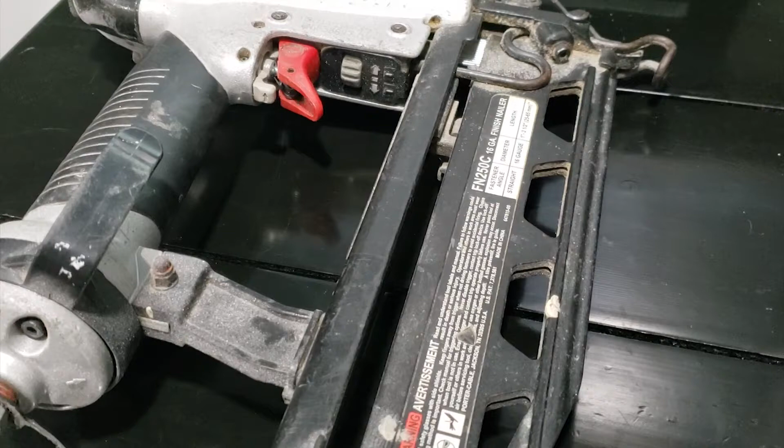Today I'm going to be working on this 16 gauge finish nailer gun, model FN250C. I was having an issue with this gun where you could hear air coming out from the trigger, so I ordered the replacement trigger valve assembly and replaced it. Unfortunately, the gun was still having issues—there was now some air coming out through the back. After taking the gun apart and thoroughly cleaning all the internals, I put everything back together and the gun was working, but it was still losing air from the back.

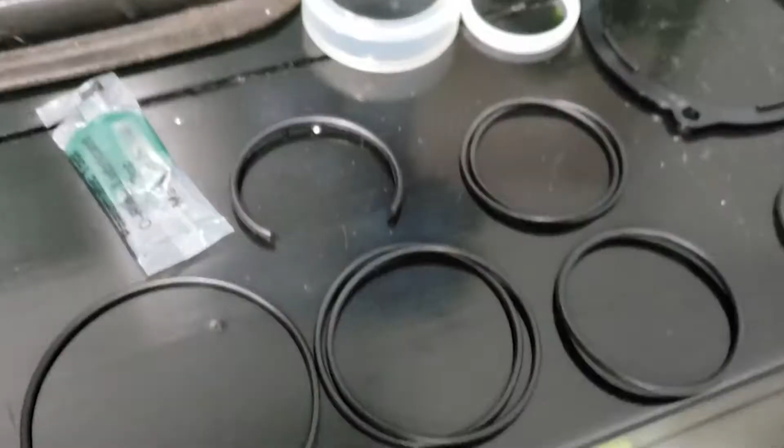So I decided to look up an O-ring repair kit to repair all the O-rings on the inside of the main body. I picked this kit from Amazon, part number 600872, and this kit is a complete O-ring kit to repair everything on the inside. This kit does not come with the trigger valve assembly that I had replaced earlier. I will provide a part number for that in the description if you guys need to replace that as well.

These are all the O-rings that come with the kit. This one and this one have two of the same size O-ring.

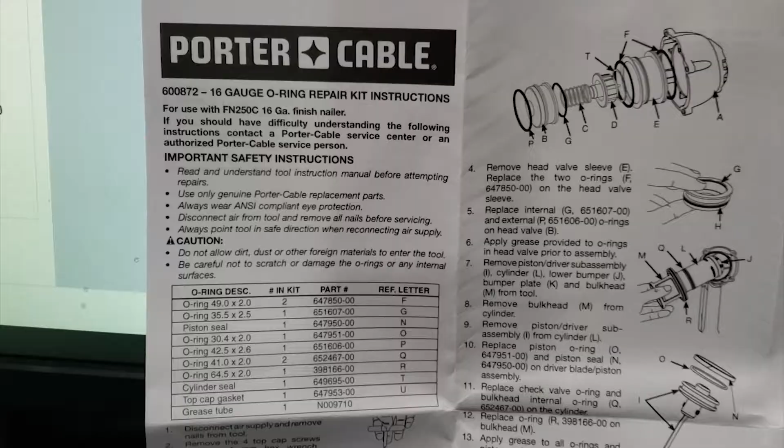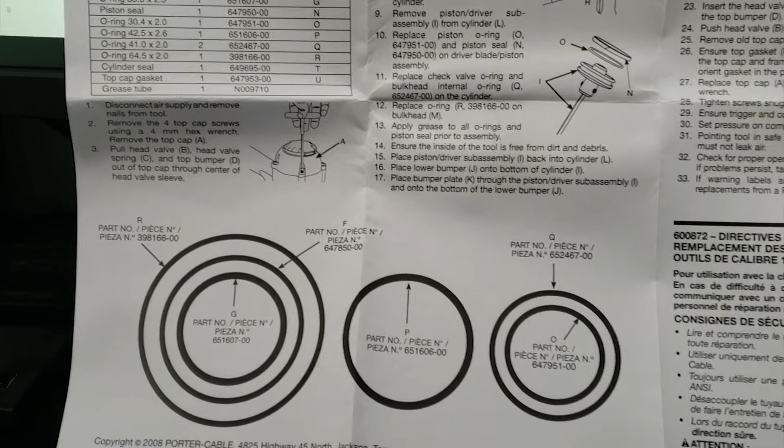Now I have taken this gun apart previously, so I've seen all the little parts inside of it and I've put it back together successfully. It's not that complicated—I'm going over the instructions. You just have to be careful and gentle with some of these gaskets as they can break on you. It's only 33 steps to take care of this. I will be scanning this document and putting it in the description for you guys if you want to look over it or if you're interested in completing the same job.

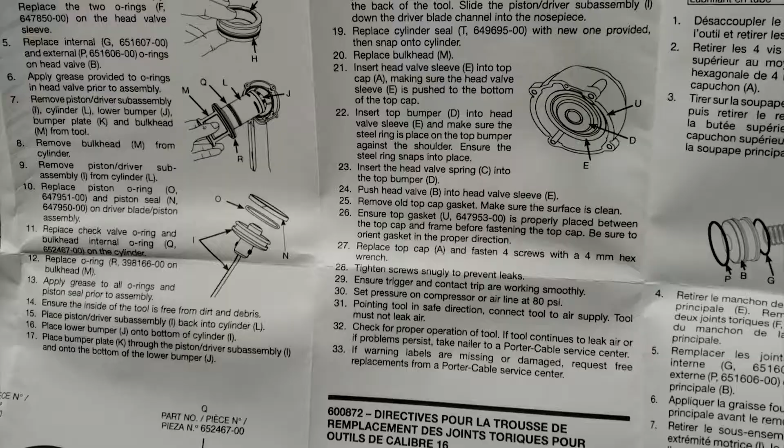In addition to the O-ring repair kit, I'm also using a hex socket set along with a couple of 3/8 extensions, a 3/8 ratchet, a small Allen key, a set of picks, and a hammer.

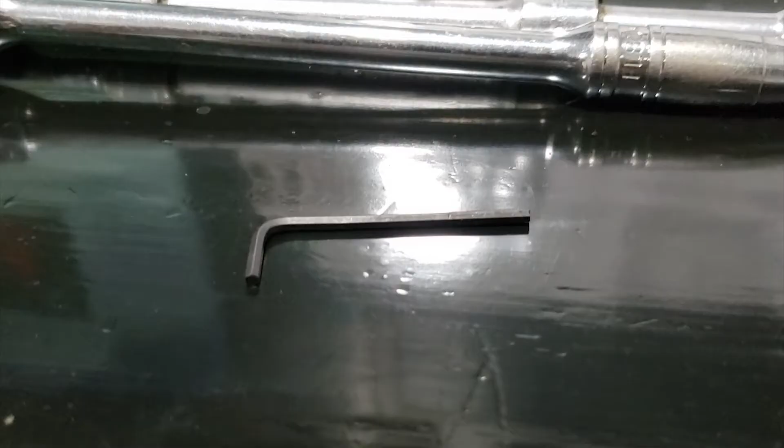I'm going to start by removing these four 4mm hex screws, and that will release the top cap. When removing those 4 hex screws, keep in mind that the cap is under tension by the spring underneath it.

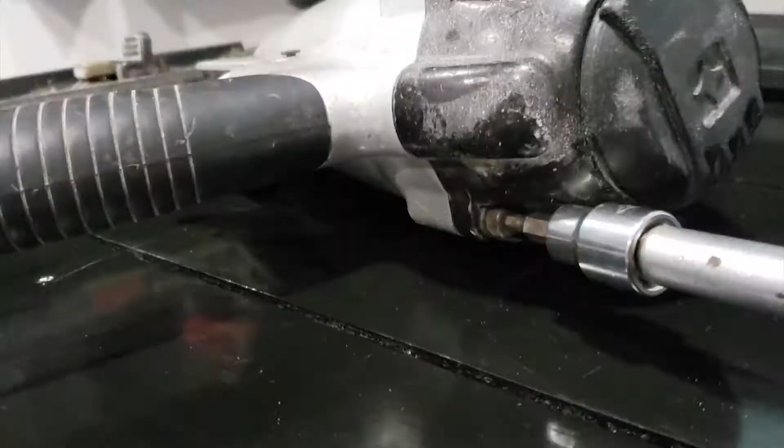I've now got my 4 hex screws out and I've got my top cap here. This is the gasket that goes in between the top cap and the rest of the body on the gun. The new kit came with a new one of these gaskets, so I'll be getting rid of this one and replacing it with a new one.

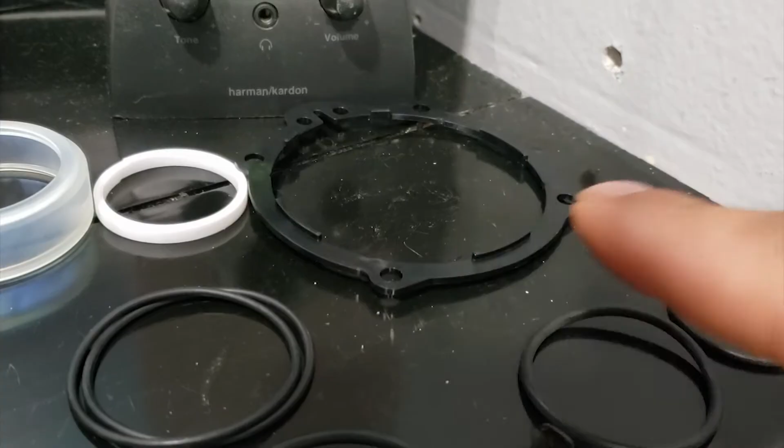There is a bit of air tool oil all over these parts, so you might want to grab a little microfiber towel and clean this stuff up so you don't make a mess everywhere. It is also important to keep in mind to not allow any dust or dirt to get inside of the tool.

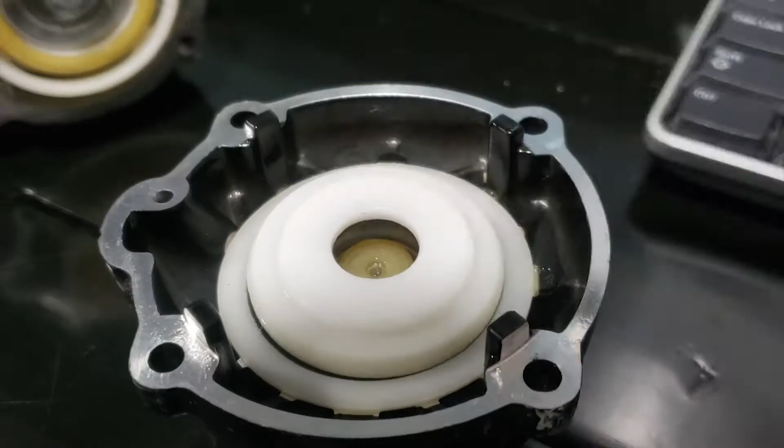I'm going to start taking apart the top cap by removing the head valve and the head valve spring. This is being held in here by the tension from the gaskets, so to get it out of there, I just pry against it like this, working it around all the edges while being gentle, making sure not to damage the head valve.

I got the head valve partially out, and again, I've just been using my pick to work the edges of it and get it to come out. Be very gentle—this is all plastic and it can easily get scratched up. If it gets scratched up, you won't get a seal anymore, even if you replace it with new seals.

You can see one of the gaskets is being exposed now. That's what keeps the head valve in there. The head valve is now out. I was able to get it out of there working it with the pick, and while getting that out of there, the head valve sleeve also came out, and it came out that easily, more than likely due to the oil that was in the tool, which helped it slide up.

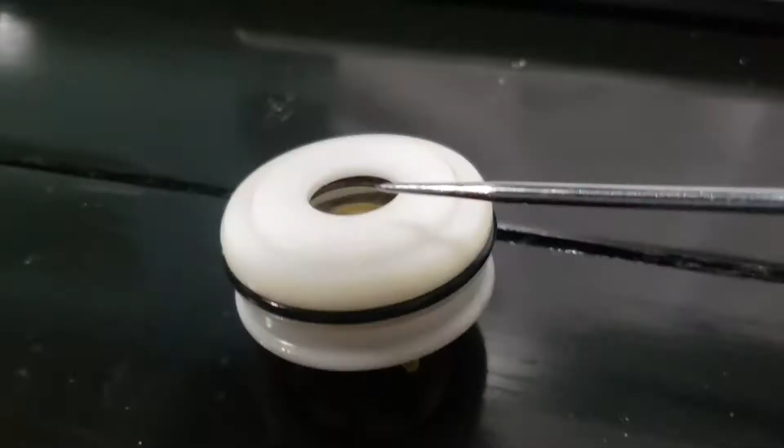If your head valve sleeve doesn't come out the way mine did, use your pick and work those edges, making sure not to damage the plastic, and it should come out the same way. I'm going to set apart my head valve sleeve as well as the top cap for now while I take the head valve apart and replace these gaskets.

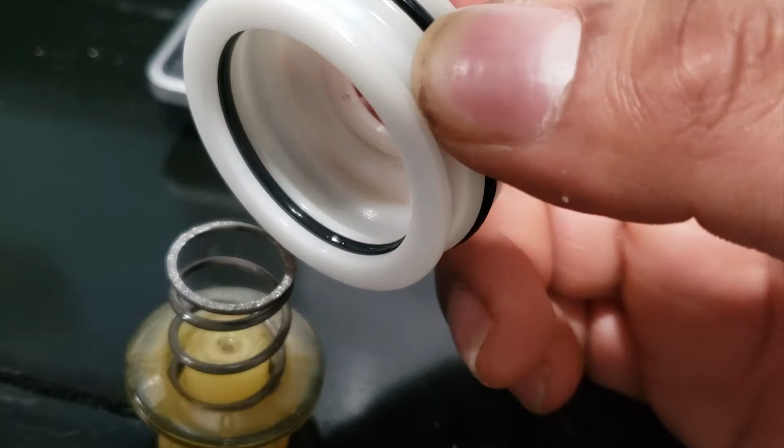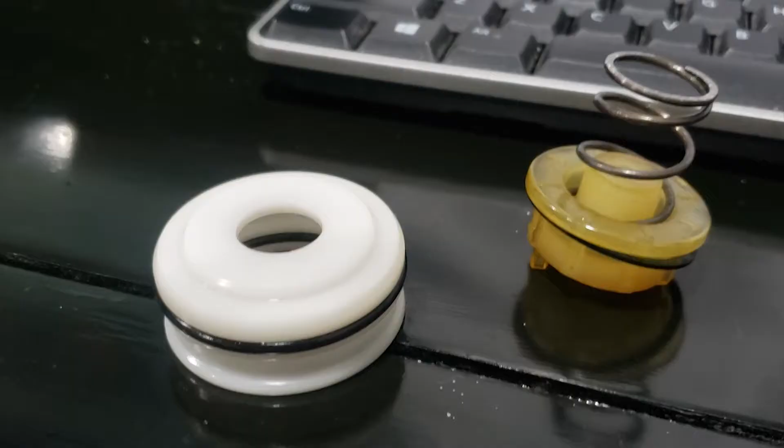The head valve, the spring inside of it, and the top bumper have now been separated. To get these to separate, I just wiggled the top bumper and it let loose. What's holding it in there is the gasket inside of the head valve. The top bumper has a cylinder seal, but this cylinder seal will not be getting replaced. The kit does come with a cylinder seal, but that one is for the piston.

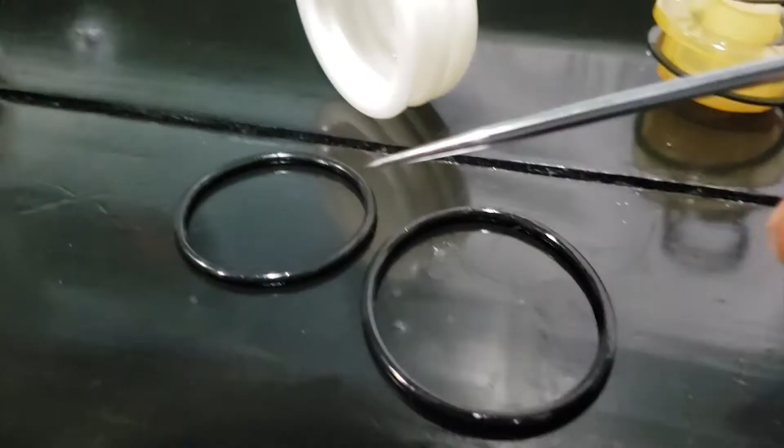With the top cap fully disassembled, I'm now going to go ahead and replace the 2 O-rings on the head valve as well as the 2 O-rings on the head valve sleeve. Using my pick, I'm going to work both of those O-rings out, being careful not to scratch the surface. I've removed my 2 O-rings that were attached to the head valve.

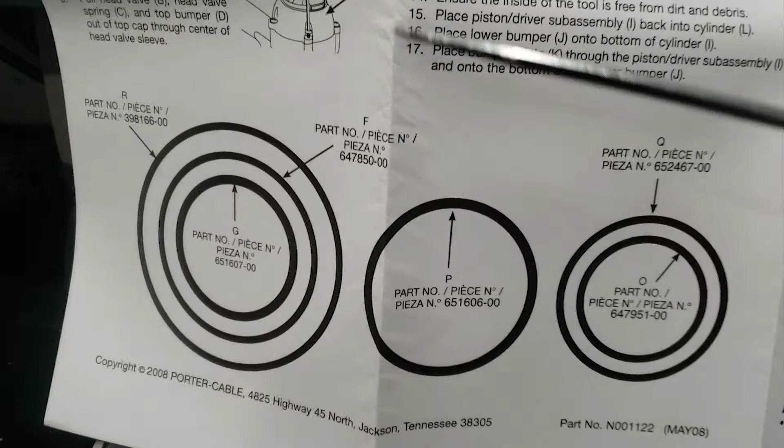Looking at the instructions, the 2 O-rings that belong to the head valve are the G and P O-rings. Looking at my set of O-rings, it appears that this one and this one are the P and G O-rings. You can also try to match them up with the old O-rings that you pulled off the head valve, and you can use the set of instructions that comes with the kit to match them up. These instructions were printed in 1:1 scale, so this drawing of the P O-ring is the exact size of that O-ring, as well as the G O-ring. The G O-ring is the smaller one and the P O-ring is the bigger one.

Before installing those O-rings, make sure to apply some of this O-ring lubricant to your new O-rings to ensure that they seal properly once installed. Both of the O-rings on the head valve have been replaced.

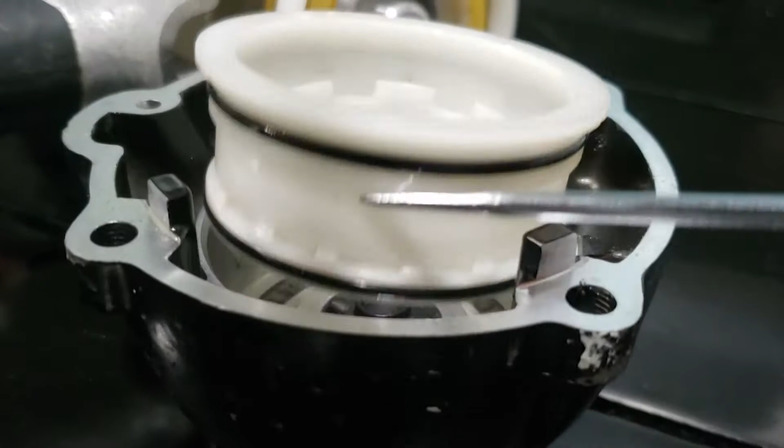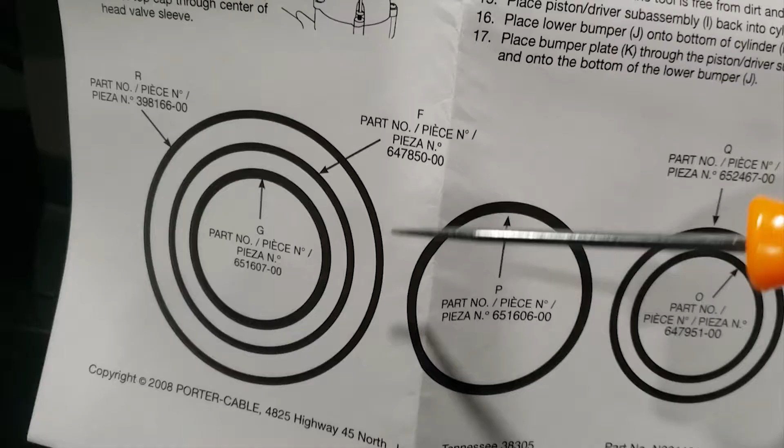I'm now going to move forward with replacing the O-rings on the head valve sleeve. Looking at the diagram, the head valve sleeve uses 2 of the same O-rings, letter F. Looking at my O-ring kit, it looks like these 2 right here are the letter F. With the kit, you get two matching pairs of O-rings. The bigger pair are the F O-rings. You can confirm that by grabbing one of the O-rings and matching it up to the instructions.

I removed both of the old O-rings and matched them up with the new ones and confirmed they are the right size. I'm going to use some of the O-ring lubricant, apply it to the O-rings, and reinstall them on the head valve sleeve.

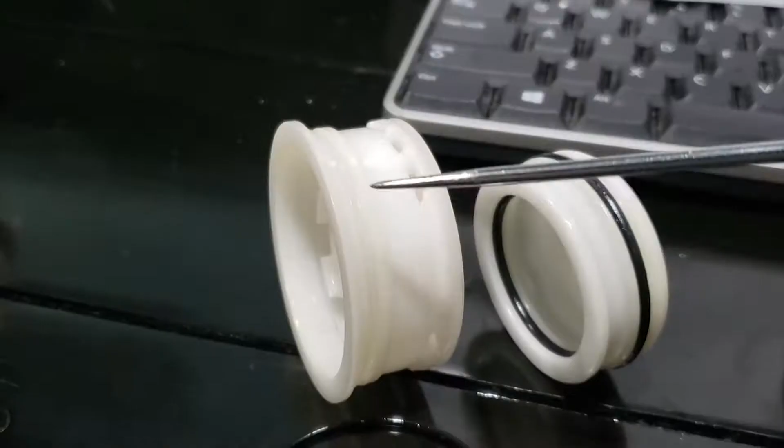There is an additional gasket for the top cap that is not mentioned in the instructions, and that is for this gasket. That gasket is what creates the seal between the top cap and the exhaust port.

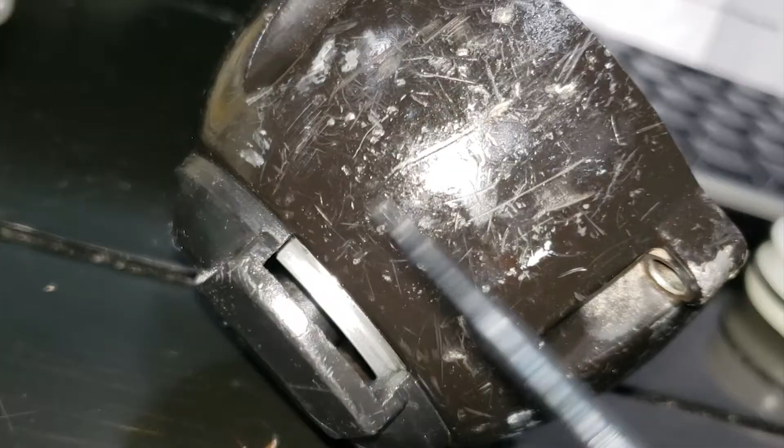To get to that gasket, you have to line up that pin with the opening here, and to get that pin to line up, you turn this exhaust port until the pin lines up with the opening. Once you line up the pin with the opening, you will see that the pin just starts sliding out on its own. Once you get that pin out of there, you should be able to separate both pieces.

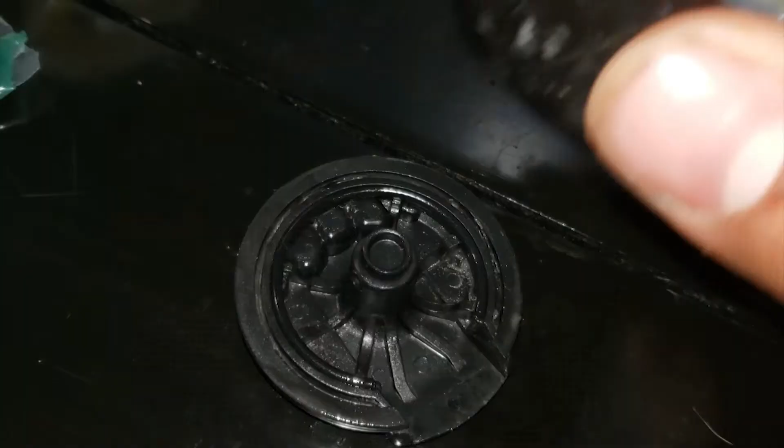There is a shim there, be careful not to lose that. This is the gasket that came in the kit that is not mentioned in the instructions. Use your pick to work that out of there. There's the gasket. Looking at the gaskets that came with the O-ring kit, it's pretty easy to match them up, as that is the only one that looks like that.

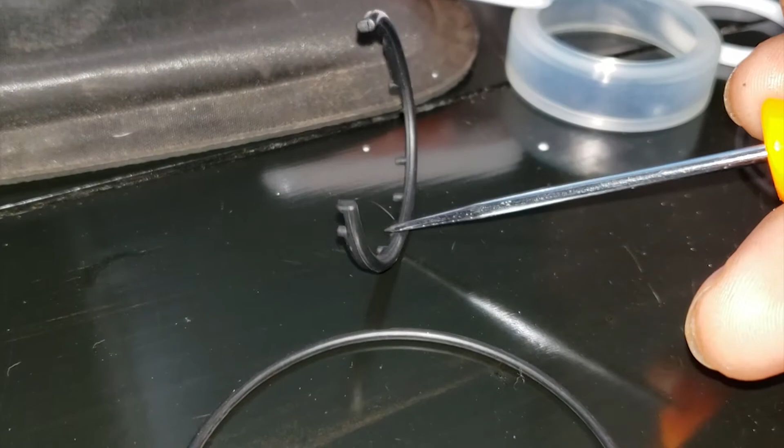Using the O-ring lubricant, apply some around this O-ring and reinstall it back onto this cover. Make sure your new O-ring is fully seated, and now this is ready to be reassembled.

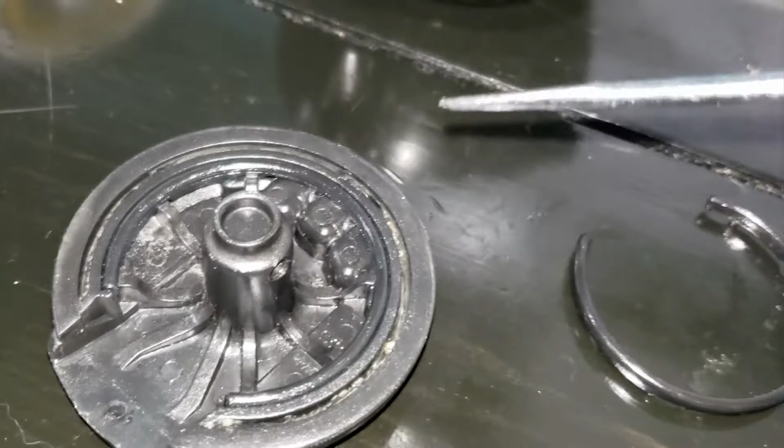The process to reassemble it is the opposite of the disassembly. I lined up the hole on the exhaust cover, and I've slid the pin back in through the opening and into the holes. I twisted the exhaust cap in the back to make sure that pin won't slide back out of there. It is now time to reassemble the head cap.

To reassemble the top cap, start by inserting the head valve sleeve back into the top cap, making sure not to grab the edge of the gasket. When you're pushing down, push evenly, and make sure that the head valve sleeve is all the way down and bottoming out.

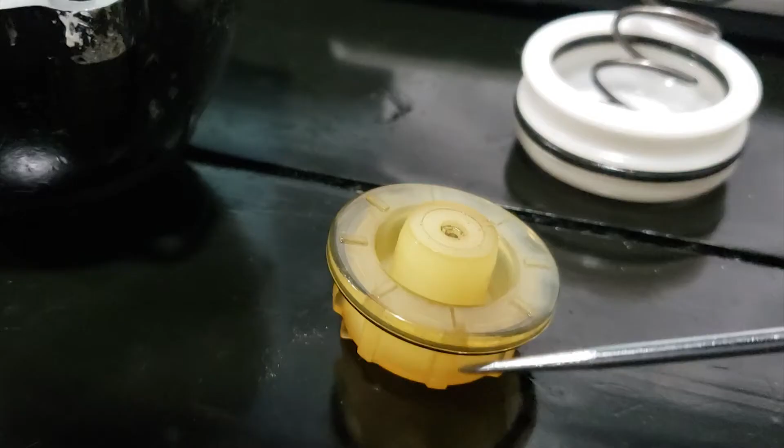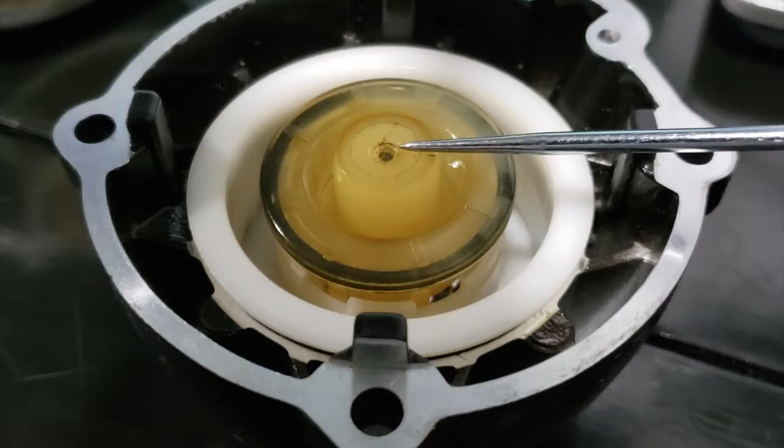Next is the top bumper. Remember, there is a steel ring here, and that needs to be pushed all the way down onto the top bumper. Next, you will notice that one of the splines on the top bumper sticks out more than the other ones. Make sure to line that spline up with the relief where this pin would normally slide out of. Once your top bumper is lined up, you can go ahead and push it down.

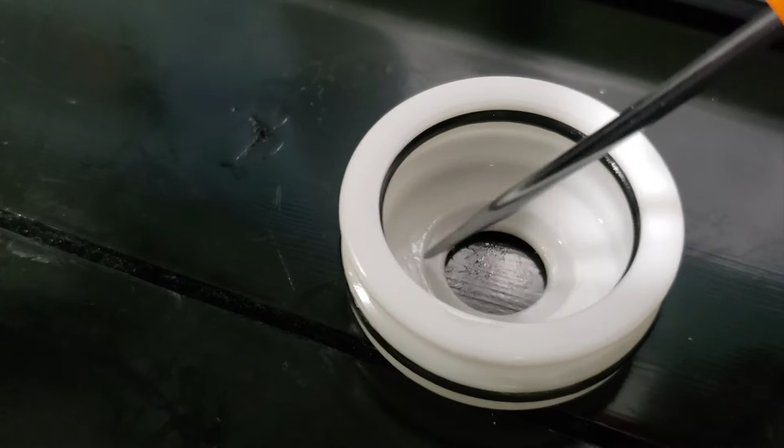Next is the valve spring. The valve spring is inserted into the top bumper, and the other end of the spring will rest on this relief on the head valve. With the spring inserted into the top bumper, you can now grab your head valve and push it into the head valve sleeve, making sure that the spring lines up with the relief on the other side of the head valve.

It is a little bit tricky to get the head valve to push into the head valve sleeve, and the best way to get this in here is to make sure you're putting even pressure so that it doesn't tilt one way. Next is the top cap gasket that sits on the surface of the top cap. This right here is your top cap gasket. Before installing it, make sure that the surface of the top cap is clean.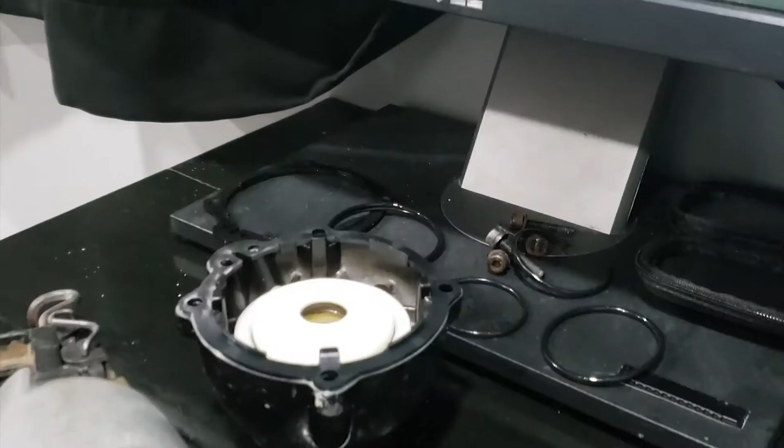The top cap gasket is the same on both sides. When installing it, make sure to line up your holes. Once it's lined up, it'll fall right into place. I'm going to set the top cap apart for now, as that assembly is complete.

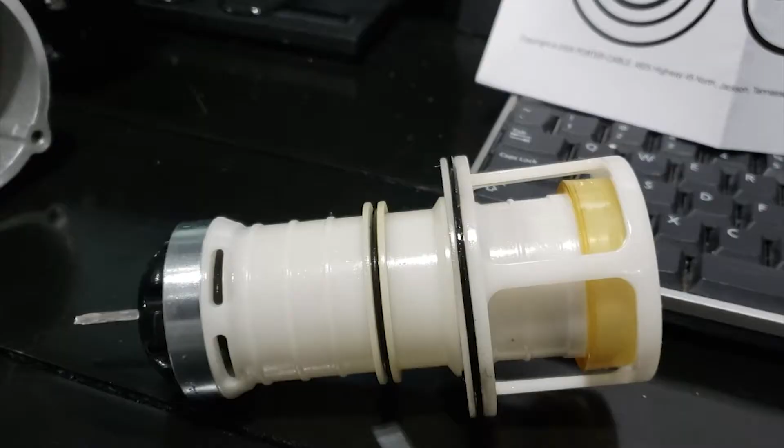Next, I'm going to remove the piston/driver sub-assembly along with the cylinder, lower bumper, bumper plate, and bulkhead. To get this out of here, just grab from the end and pull out towards you. It might be a little tricky to get this assembly out of there. Just wiggle it out gently and it should come out. That is what the inside of the gun looks like now. There is nothing left in there.

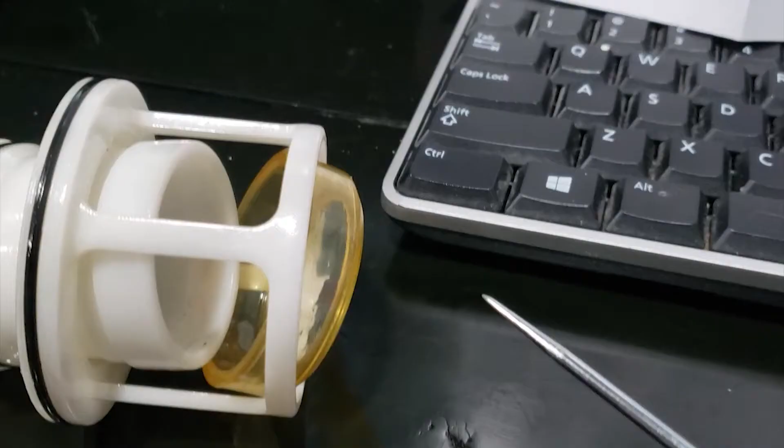Start by separating the bulkhead from the cylinder. The bulkhead is able to separate from the cylinder by sliding it up this way. The cylinder seal will also need to be removed in order to get the bulkhead out of there. Work the edges of the cylinder seal in order to get it out of there. A new cylinder seal was provided in the kit.

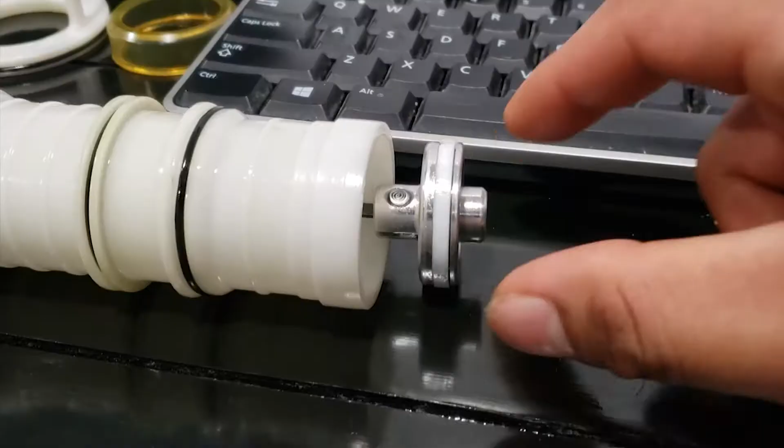Remove the piston/driver sub-assembly from the cylinder by sliding it out going this way. The piston seal and the O-ring behind it will need to be replaced. The piston seal has an opening here. Grab the edges of the seal and pull it off. With the piston seal removed, you can now see the O-ring attached to the piston/driver. Remove the O-ring attached to the piston/driver.

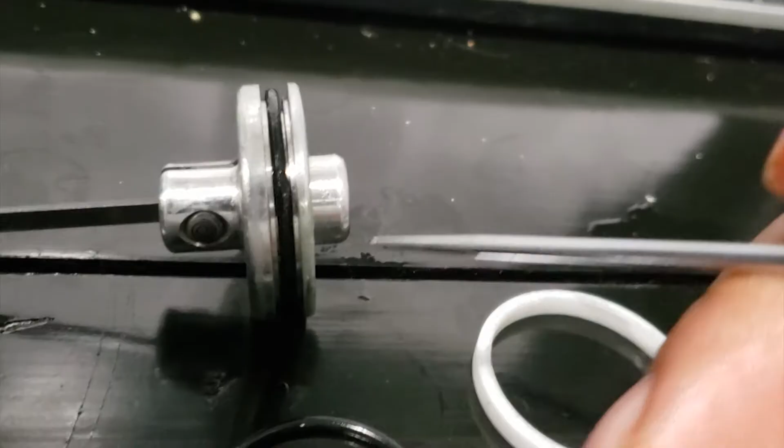From the O-ring kit, the smallest one left is the piston O-ring, and this white ring is the piston seal. Comparing them side by side, they appear to be the same size, the piston O-ring being letter O and the piston seal being letter N. Once the new piston O-ring is installed, you will notice that it is a little bit loose. That is actually normal, as it is the piston seal that picks up the slack. Reinstall the new piston seal.

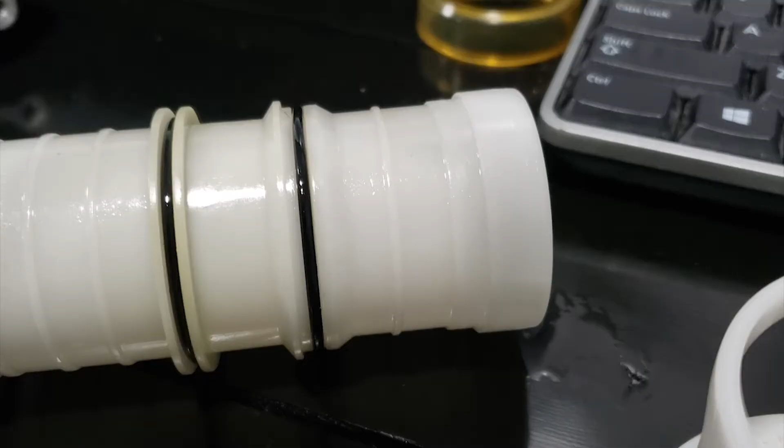Up next is the check valve O-ring and the bulkhead internal O-ring on the cylinder. So that's going to be both of these O-rings right here on the cylinder, and those are the letter Q O-rings, so they're going to be the same. Looking at the remaining O-rings, it looks like these are the Q O-rings. Again, be careful when removing these O-rings so you don't damage the cylinder.

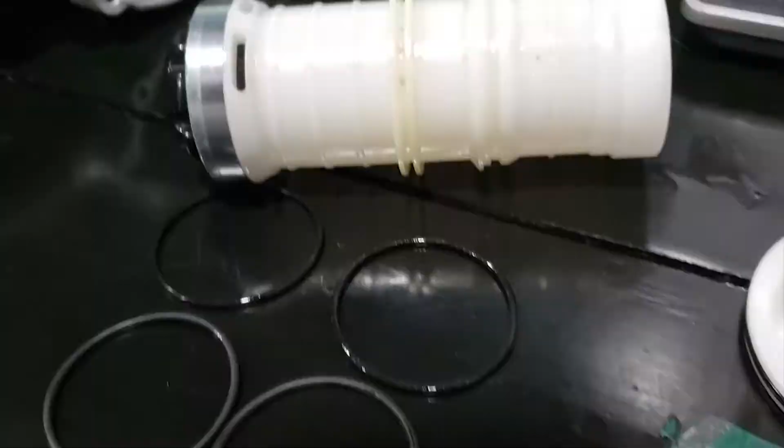The final O-ring left to replace is the one on the bulkhead. Following our instructions, it looks like that's going to be O-ring R. The R O-ring is the final and biggest O-ring in the kit. Matching up the old O-ring with the new one on the left, they appear to be the same size.

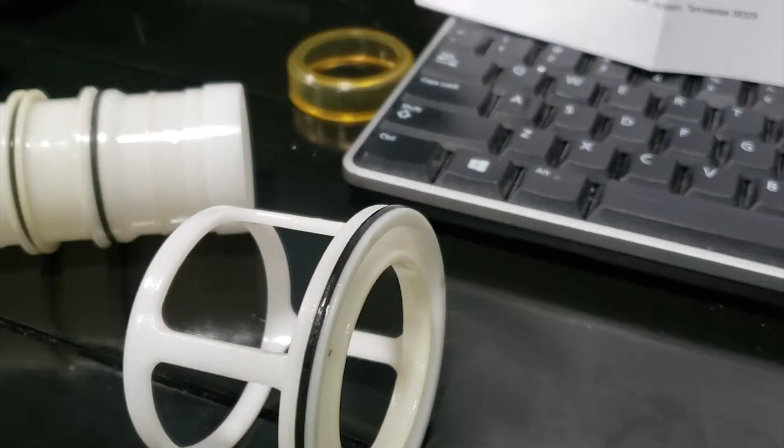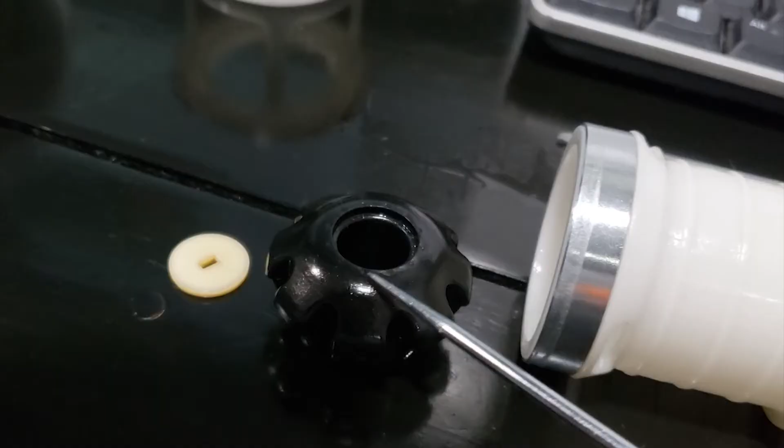The piston/driver subassembly, cylinder, lower bumper, bumper plate, and bulkhead are now ready to be reassembled. Make sure that all the O-rings have enough grease applied to them before reassembly. The lower bumper and the bumper plate may or may not have fallen off when removing the cylinder from the body of the gun. Start by placing the piston/driver subassembly back into the cylinder.

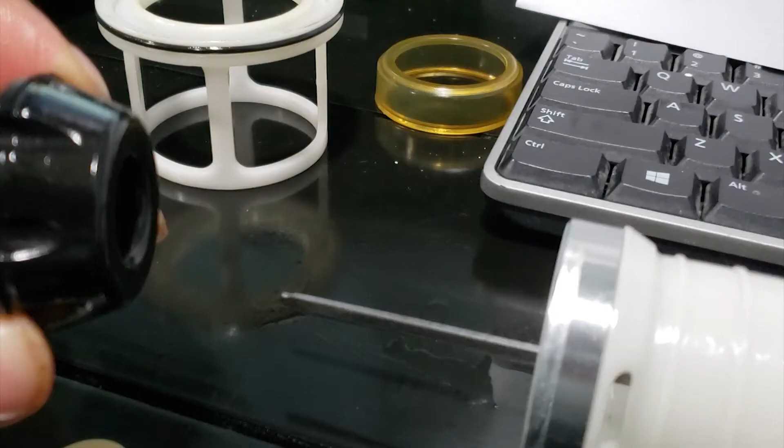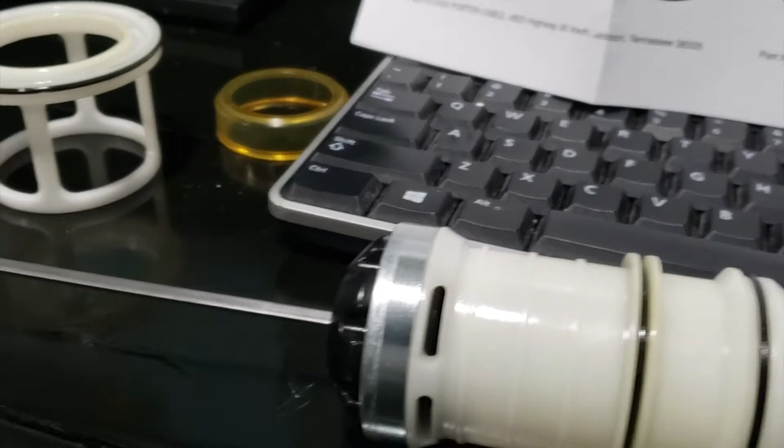Place the lower bumper onto the bottom of the cylinder. Place the bumper plate through the piston/driver subassembly and onto the bottom of the lower bumper. Now slide the piston/driver subassembly down the driver blade channel and into the nose piece. The head of the piston/driver subassembly will line up with the nose piece. The piston/driver subassembly will not slide all the way in.

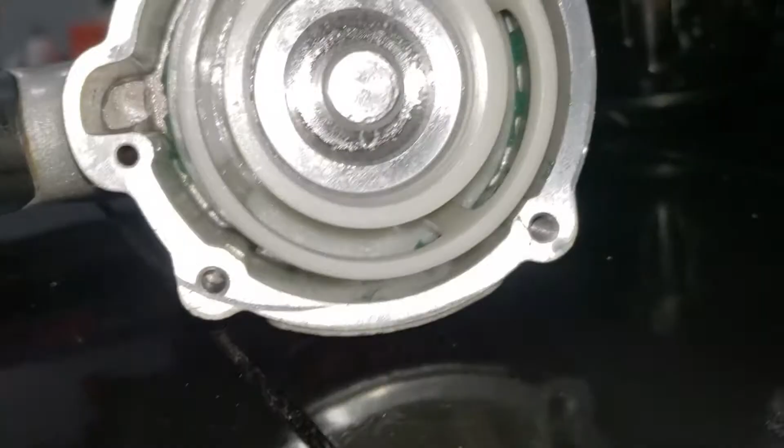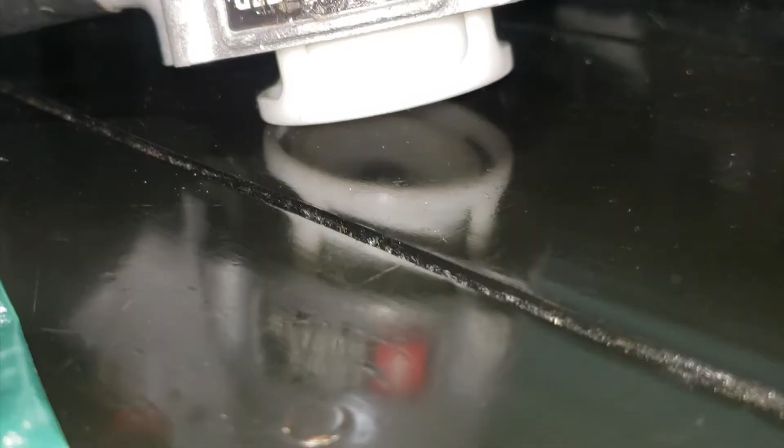Reinstall the bulkhead by sliding it onto the cylinder. Keep even pressure on all sides to ensure it slides in evenly. Getting the bulkhead to sit back in there is probably one of the trickiest parts of this procedure, and that's because it's sealing against the cylinder and it's also sealing against the housing on the tool. So what I ended up doing to get it to seal in there evenly without crushing or damaging any of the new O-rings is put it on upside down and then put pressure from the top down evenly to get it to slide back in there.

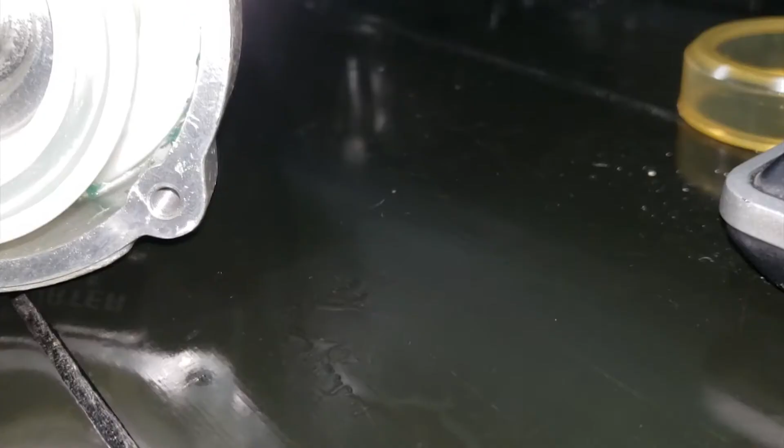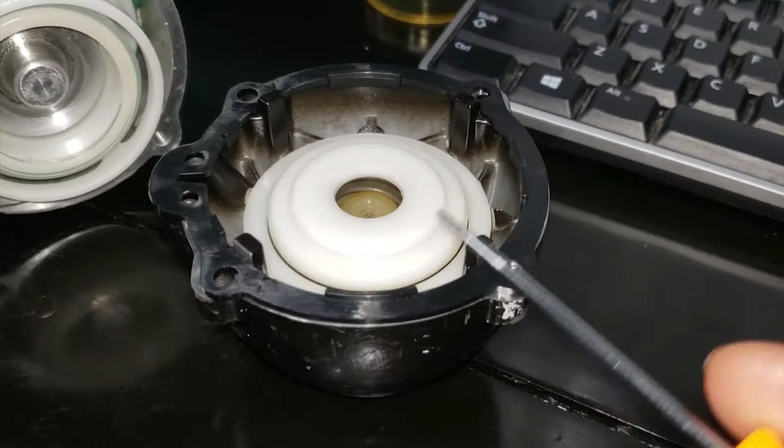Next, grab your cylinder seal, letter T, and snap it onto the back of the cylinder. I've got the cylinder seal halfway in there. I applied a little bit of this grease onto the edges to help it slide onto the cylinder a little easier. Okay, we are now ready to reinstall the top cap. Just make sure that the holes on the top cap gasket are lining up properly. These two holes on the top cap line up with the bottom of the gun.

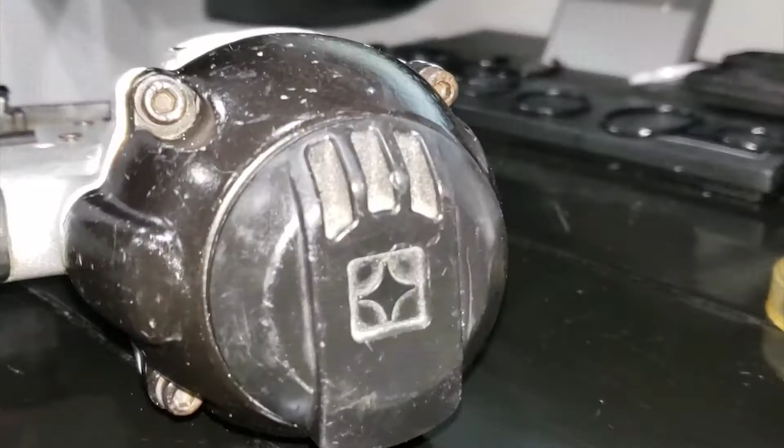I've now got all 4 of my screws started. I'm going to finish running them down. I would suggest running these down little by little in a crisscross pattern. Remember that top cap is spring loaded, so there's going to be tension when putting the screws back in. All 4 screws are now installed.

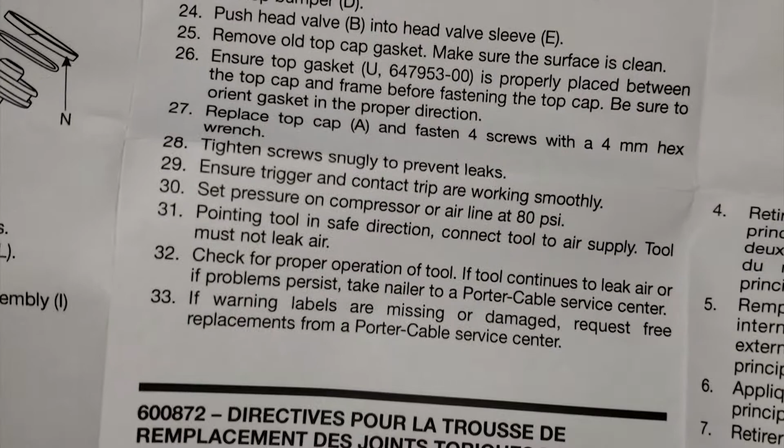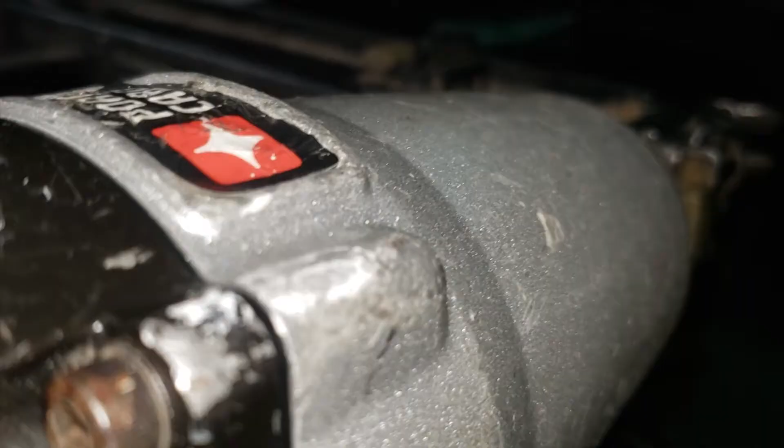There are no torque specs on these instructions. It just says to tighten screws snugly to prevent leaks, so I just tightened them down to what I thought was tight enough. Again, remember there's a gasket in between the top cap and the body of the gun, so they don't have to be extremely tight. I also noticed that these screws had some sort of blue Loctite on them, so if you guys want to go ahead and use some blue Loctite, you are welcome to.

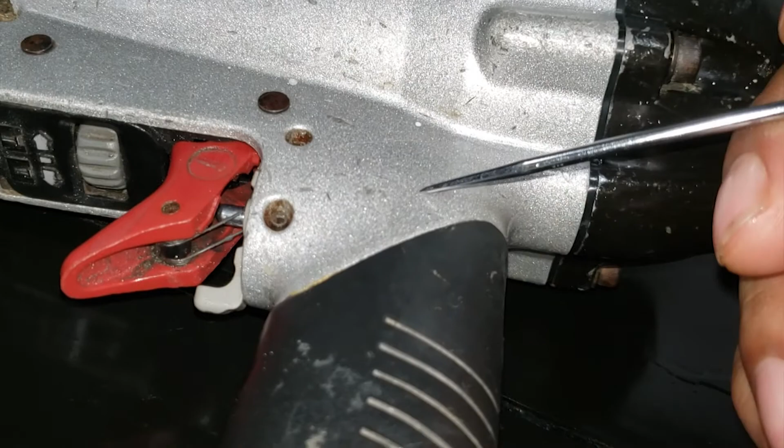So that actually covers all the instructions for installing this O-ring kit. Now I'm also going to be showing you guys how to replace this trigger valve assembly. To get to the trigger valve assembly, you want to start by driving these 2 roll pins out. I like to use a small Allen key and a hammer. Be careful not to damage the head of the roll pin. I've got both of my roll pins out.

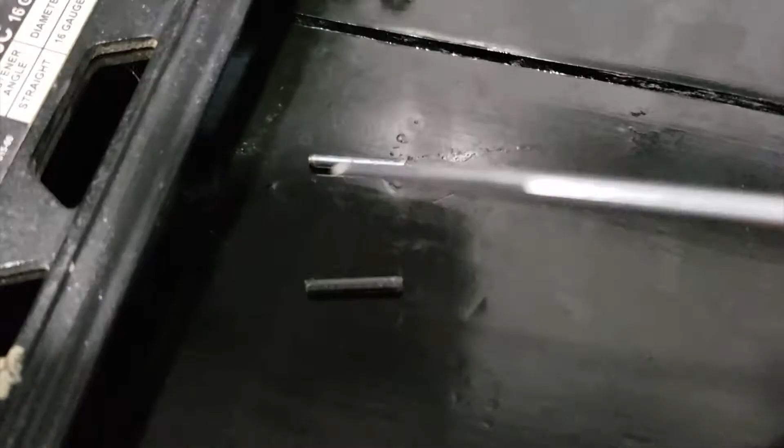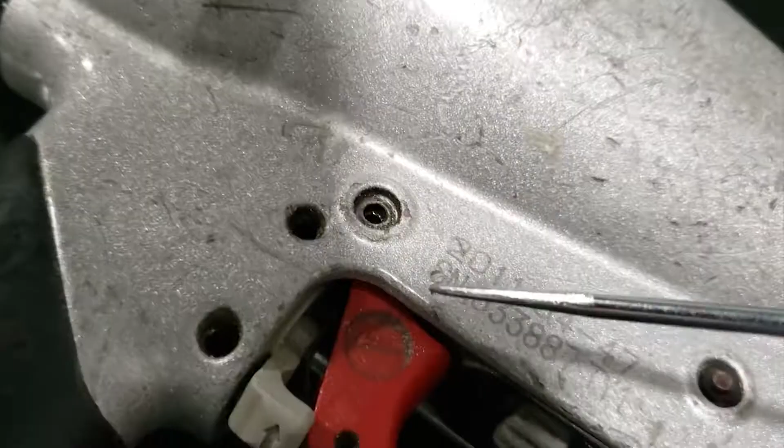The longer roll pin goes on the hole up top and the smaller roll pin goes on the hole at the bottom. You will also have to remove this pin right here that holds the trigger button. Be careful not to damage this little O-ring that comes out when you slide that pin out. There is one similar on this other pin right here. We do not have to remove this pin, just this one. That little O-ring will lock onto the head of this pin.

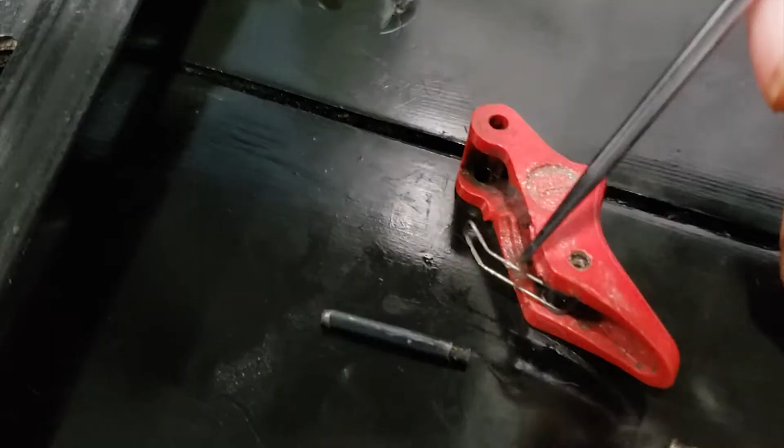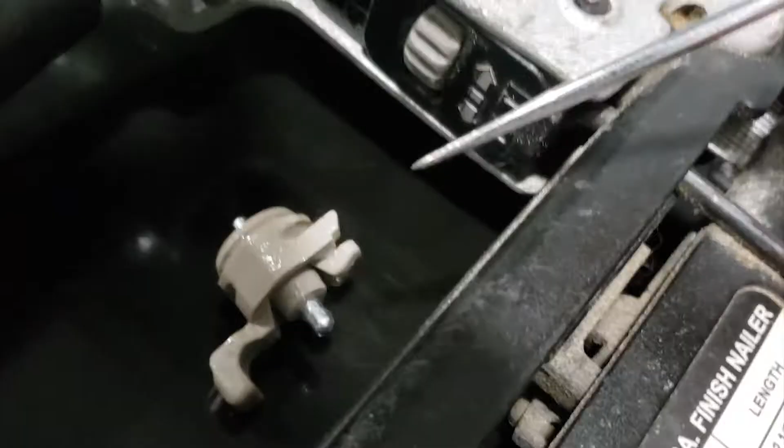You can now start removing your trigger button. You may have noticed that this metal tab was grabbing onto the head of this. It needs to be put back the same way it came out. This is a brand new trigger valve assembly, so it's going to be a little tricky to get it out. You can use a pick to help it come out. It's fine if it starts coming out in pieces like this. I'll show you guys how to reassemble it. Use a pick to keep working the rest of the trigger valve assembly out.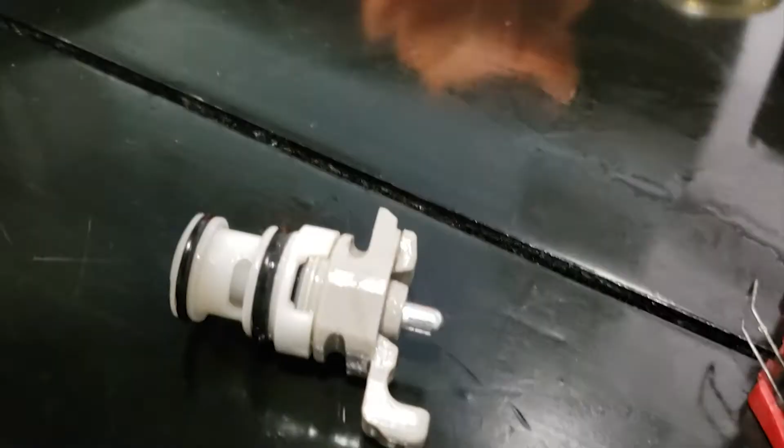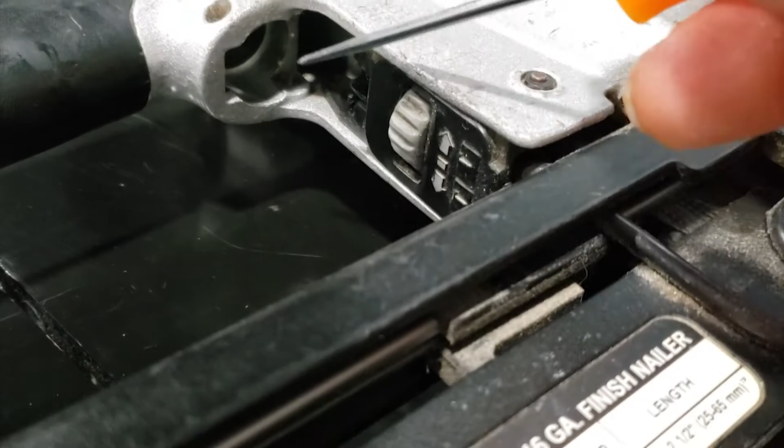I'm going to go ahead and reassemble this and show you guys how to install it. To reinstall it, you literally just push it back into the hole where it belongs. Put your trigger back on, your roll pins, and the pin for the trigger, and that's it. Make sure to push it all the way down. The lip of the trigger valve assembly will sit flush against the surface of the gun.

Now grab your trigger and reinstall it. Keep in mind that this metal tab has to sit on top of this. With the trigger valve assembly and the trigger reinstalled, it is now time to slide the pins back in. The trigger pin is held by this little O-ring. To reinstall it, just hit it on top of the pin, hold the pin firmly from the other end, and push the O-ring onto it.

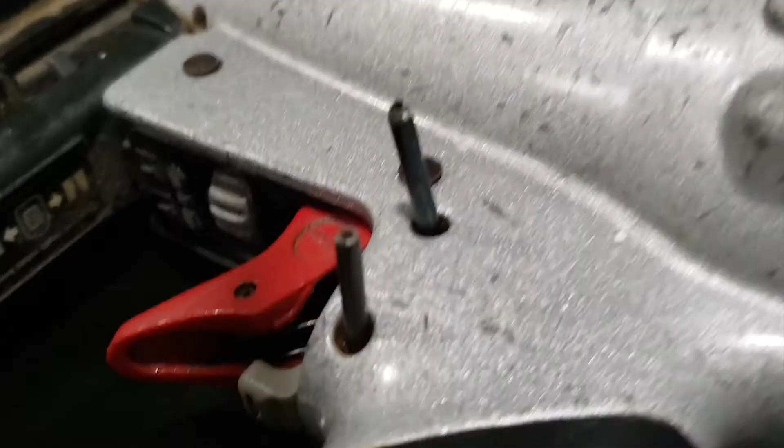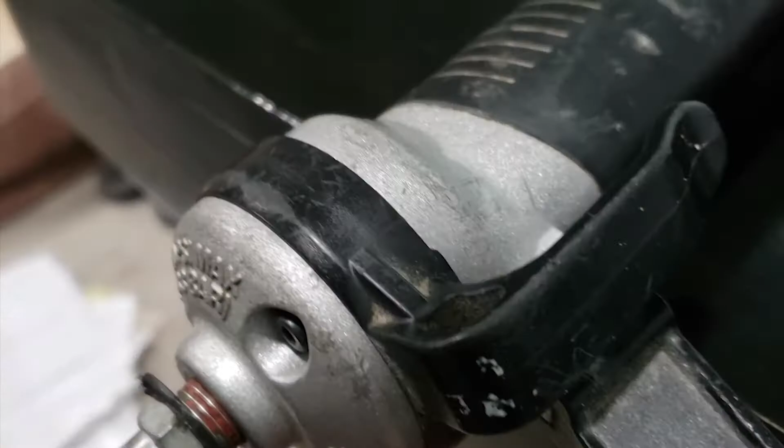Reinstall the roll pins back onto the trigger valve assembly. Remember that the bigger roll pin goes on the top and the smaller one is on the bottom. Both the roll pins have been reinstalled. The O-ring kit has been installed. All that's left is to test the gun out. You can also disassemble this piece if you guys want to go ahead and clean it. It just uses 3 hex screws. There is no O-ring for this bottom piece, just a plastic gasket that it uses.

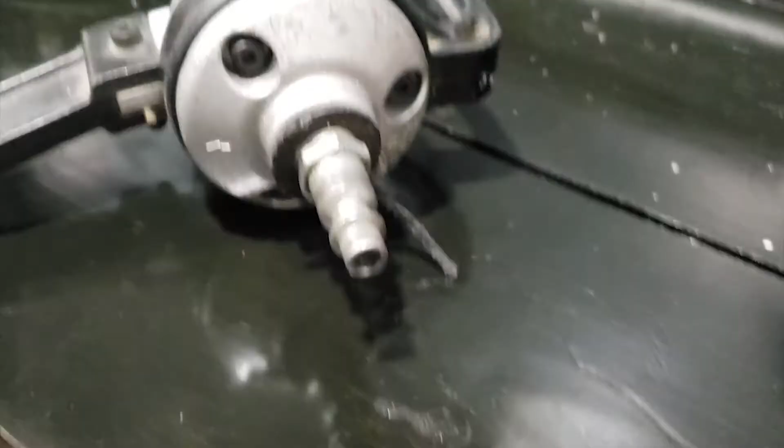Alright guys, so I'm actually going to end up taking this gun apart so I can show you what the inside of this looks like. Again, I would suggest taking it apart to do a thorough clean. It will give you access to this part of the body. I've now got all 3 of the screws out of there, and this is the bottom cap.

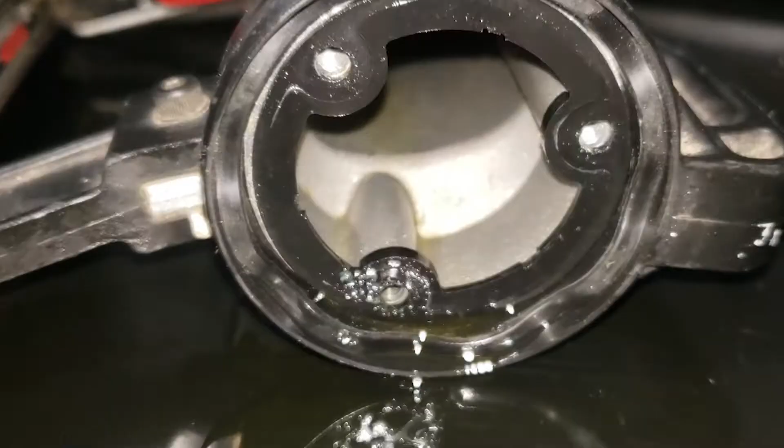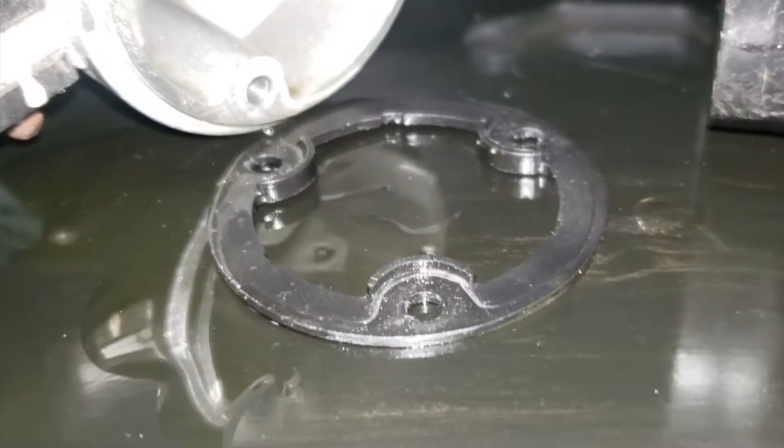You will notice that there is a wave washer at the end of that bottom cap, and looking into the gun, the bottom of this plastic piece is where that wave washer will lock onto, and it also serves as a belt clip. There is also another plastic washer that also helps create that seal. This does have tabs on the inside of it, and those will locate onto the gun when installing, and they will hold in place. Make sure that this is thoroughly clean before putting it back together to avoid getting any contaminants in your gun and damaging your seals again.

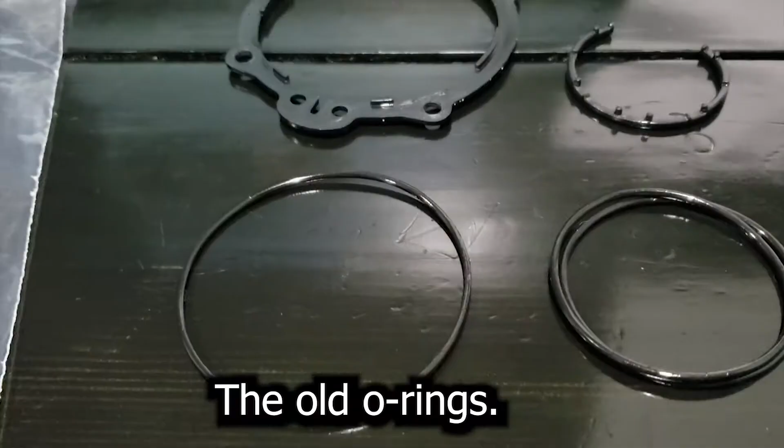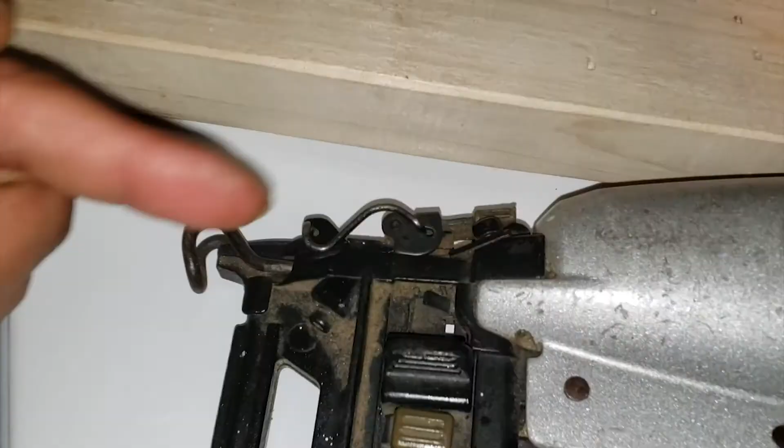I got the gun put back together. I've got it hooked up with my air hose, and I actually had to end up taking it apart again because the piston / driver would come out but it would not go back in. So after taking it apart, I just made sure to evenly tighten this up to make sure that none of the O-rings were getting crushed on the way back in. After putting it all back together again, it was shooting properly, but you could still hear a little bit of air coming out through the front and a little bit coming out through the back.

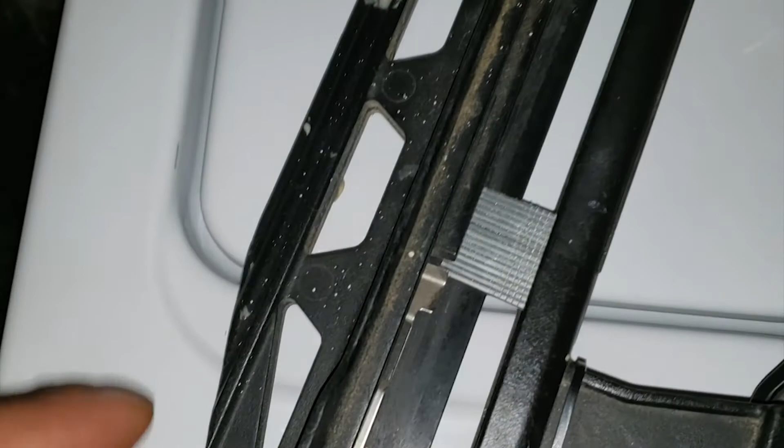So what I did is I shot the gun a whole bunch of times onto this piece of wood. I don't have any nails going through it right now, and shooting it a bunch of times allowed all the seals in here to sit properly, and it's no longer leaking any air. I'm in here in my garage next to the HVAC unit, so you'll probably hear a little bit of that sound in the microphone, but I'll try to put the microphone as close as possible to the gun so you guys could hear there is no more air leaking out of this.

The most common spot where these leak air out of is the trigger. If it's leaking air out of the trigger, you will have to replace your trigger valve assembly. If it's leaking air through the back, through the exhaust port, or through the front, then you will have to take it apart and install the O-ring kit to fix that issue. Okay, I'm now going to show you guys again. There's no nails loaded, it's empty.